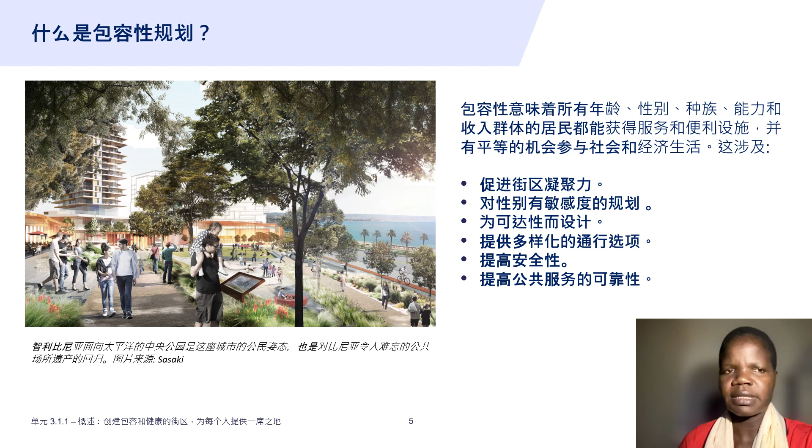Cohesive communities create opportunities for social interaction and community building by providing shared spaces and services, promoting collective ownership, and by providing co-housing and multi-generational living.

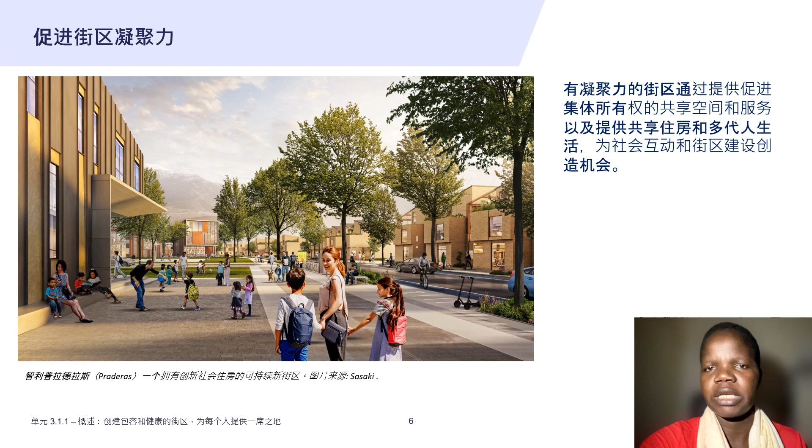Public space design should be flexible enough to meet everyone's needs. Everyone navigates the built environment differently, with abilities changing across a person's lifespan. Universal design is the design and composition of an environment so that it can be accessible, understood, and used to the greatest extent possible by all people regardless of their age, size, ability, or disability.

It ensures universal access to public space, infrastructure, amenities, jobs, trainings, and services. The principles of universal design are supposed to guide the design of neighborhood environment. They may be applied to evaluate places for retrofit and for new designs.

The principles ensure that places are accessible to everyone regardless of their physical, cognitive, or mental ability, and that the places are comfortable by bringing a sense of safety and belonging to everyone.

The design also must be participatory, that is, the design must be undertaken together with people living with disabilities. And the design has to be ecological by bringing in nature to provide cognitive, mental, and physical health for people of all ages and abilities.

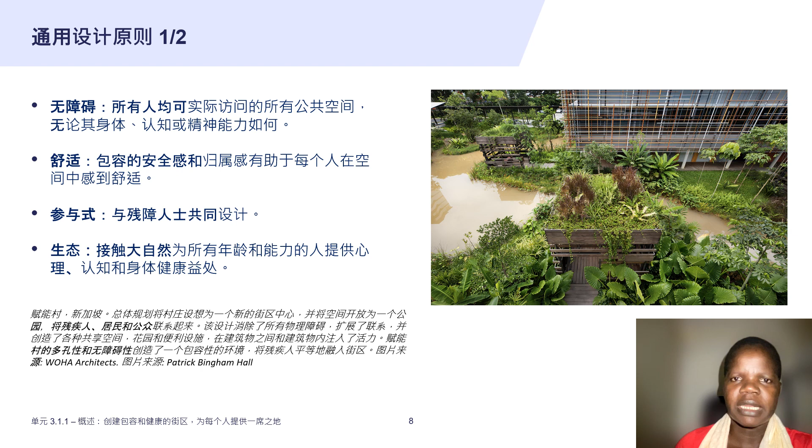Design of public spaces must be clear and understandable, with very legible multisensory signage and signals to help people of all ages and abilities to understand how to move through spaces. Universal design is also multisensory, incorporating design elements that can be accessed through different senses and provide multiple systems of navigation. It is predictable, maintaining the same clear and understandable design cues throughout a public space.

It is also walkable or traversable, that is providing wide sidewalks and bicycle lanes. Amenities like shops, restaurants, and medical facilities nearby help those with limited range to manage and maintain many aspects of their lives independently.

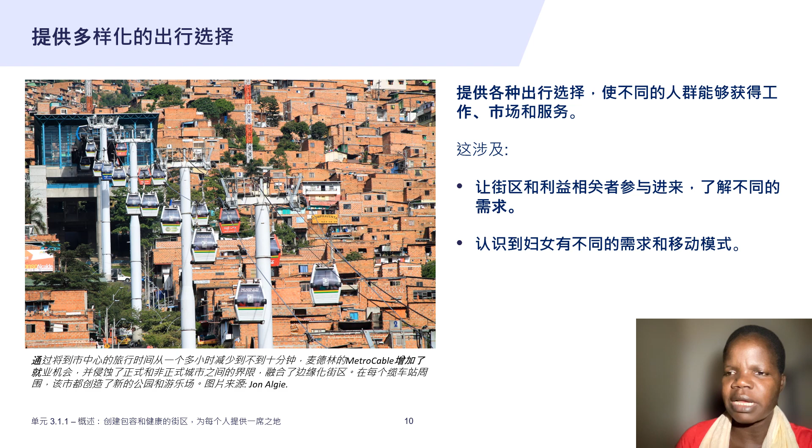Offering various mobility options allow diverse population to access jobs, markets, and services. This involves engaging the community and stakeholders to understand the diverse needs and recognizing that women have different needs and mobility patterns.

Planning with gender sensitivity takes into account that women and girls tend to be impacted the most by major environmental issues such as air pollution, biodiversity loss, deforestation, waste disposal, and exposure to toxic chemicals.

Therefore, gender-informed planning sets a target for women's representation in municipal council or committees. It supports the training of municipal staff members in gender-inclusive urban planning. It also ensures the design of public spaces with a gender-inclusive participatory process. It fosters the creation of safe spaces for women for informal work and outdoor markets.

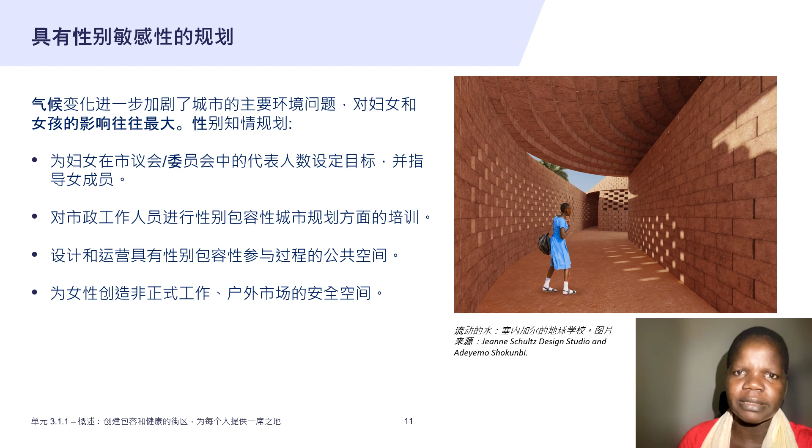The perception of safety and security can be improved by providing sanitation facilities in transport infrastructure and public space, adequate street lighting, pavements and sidewalks, and gender-based violence prevention and response services.

Reliability and resilience are enhanced by access to reliable service providers, for example energy and clean water, for all groups. These services must be resilient to climate or other events such as pandemics.

Welcome to Part 2 on designing places for healthy living.

According to the World Health Organization, health is a state of complete physical, mental, and social well-being, not merely the absence of disease or infirmity. Green and thriving neighborhoods with high livability foster comprehensive health as defined by the World Health Organization. Transforming housing and public spaces into healthy places creates conditions more conducive to community well-being.

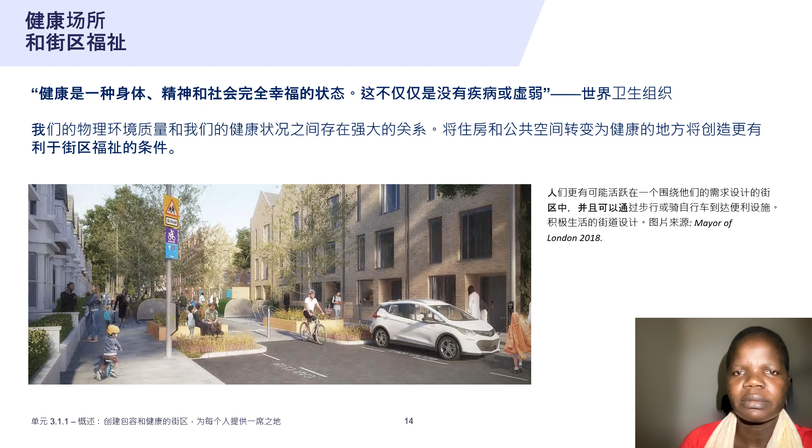Health begins in homes, workplaces, schools, and communities. The neighborhood layout shapes health choices and behaviors. Essential elements for people to engage with each other, eat nutritiously, work out, and play include natural spaces, safe streets and vibrant public spaces, and healthy and affordable foods nearby.

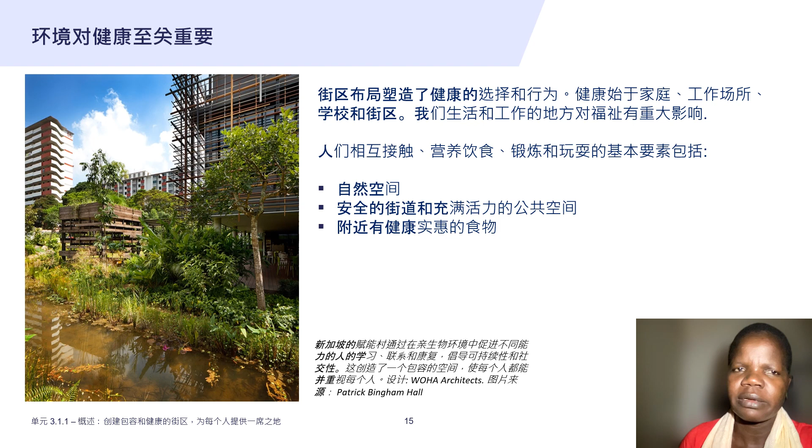Nature draws multiple health benefits, for example physical activity, diminished stress, longer life expectancy, and stronger social bonds. Policymakers can enhance natural spaces by providing access to nature with street trees and landscaping, investing in new parks, greening sidewalks, and creating waterscapes.

Solutions for safe streets and vibrant public spaces can be relatively simple and cost-effective. Policymakers can, for example, widen and resurface footways, reduce speed limits, and designate cycle lanes on streets or off streets using white lines or physical segregation alongside improved signage.

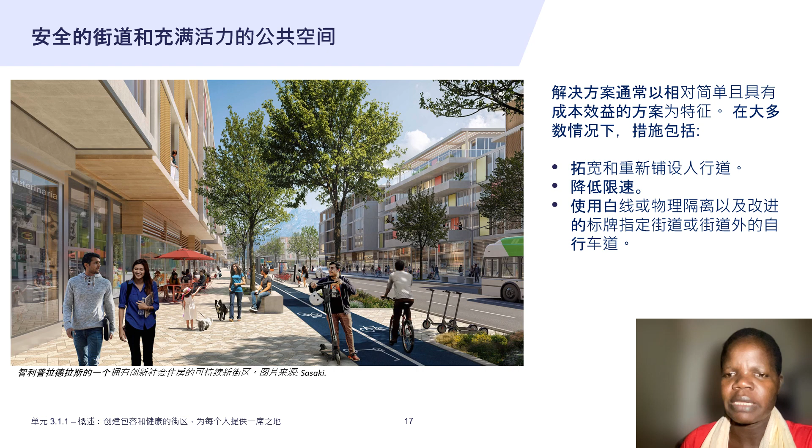Unhealthy foods contribute to diabetes and cardiovascular diseases in low-income neighborhoods. Policymakers can promote healthy and affordable foods by allowing proximity to grocery stores that sell fresh fruits and vegetables near homes, and by promoting urban agriculture to provide sources of fruits and vegetables within 20 minutes of home. Beyond nutrition, community gardens create long-lasting social connections within the community and have mental health benefits.

Groups susceptible to health problems encompass the youngest and oldest population, those with chronic illness risk factors, and those with low income. Inclusive planning for health involves undoing disparities in how long people live and how healthy they are, engaging the community in planning and follow-up of actions, and consulting people with needs, women, children, elderly people, and people with disabilities.

Welcome to part 3 of this unit, focusing on creating affordable neighborhoods.

Good and affordable dwellings are essential for physical and financial security, economic productivity, and human well-being. Besides demand-side measures like social welfare allowances, policymakers can implement supply-side measures with regulatory and planning incentives.

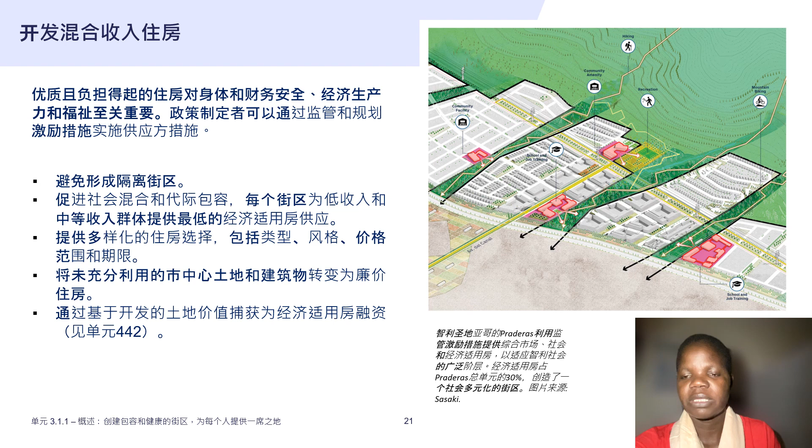Dwelling locations matter for affordability, and transportation costs impact the poorest, who are hit hardest by the lack of public transport systems. In the US, for example, in 2016, according to an ITDP survey, the lowest earning 20% of the population spent an average of 29% of their income on transportation costs.

A project integrating affordable housing and public transport is Praderas in Santiago, Chile. Affordable housing represents 30% of units, creating a socially diverse community. Praderas is also committed to creating an equitable and healthy living environment, including access to amenities and open spaces like no other socially integrated project in Chile. Praderas has 3 times the area of green space per capita compared to the wealthiest neighborhoods of Santiago.

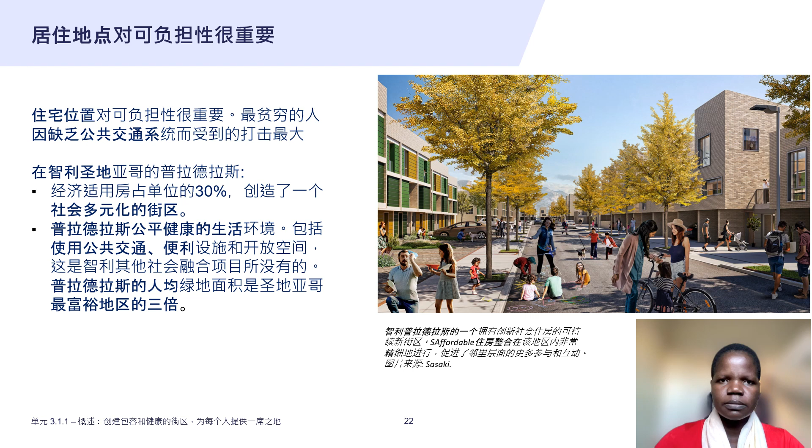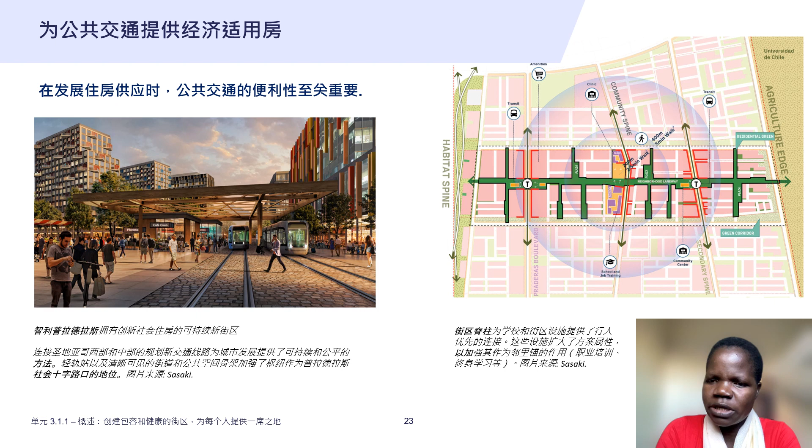When developing housing supply, accessibility to public transport is essential. In Praderas, for example, a pre-feasibility study for a new transit line along Route 68, the Superspine, has proved financially attainable and will greatly improve access to the city for this historically neglected part of Santiago. The Superspine is tied to a multimodal metropolitan transport strategy that triples the transit catchment area in western Santiago, serving over 3 million people. Welcome to the final part of this unit on upgrading informal settlements.

Although every city and informal settlement is unique, some common elements of successful upgrading practices can be synthesized. These include ensuring participation, providing physical infrastructure as the backbone of slum upgrading, addressing the needs for social infrastructure, ensuring tenure security, and addressing the root of the problem by creating opportunity structures.

Ensuring tenure security is a first step, as informal land markets are the way in which most households in cities in the global south get access to land and housing. Therefore, cities need to work towards formal land markets that work better for the urban poor. Policy should ensure that all households have access to different options with adequate shelter and services in suitable locations at an affordable cost. All households should have legally recognized tenure so that they have greater long-term security. Owners of property should be allowed to sell their properties at reasonable prices when they wish without compromising their future rights to safe and secure housing.

City governments can undertake many interventions to make land markets function better and enhance the security of tenure for residents. Actions include engaging with residents and undertaking data collection to intervene in land markets. Reforming the formal legal state-recognized land system can make it more widely applicable and useful for the poor. Cities may also implement managed land settlement programs and support owners to undertake formal transactions. Improving the security of tenure for informal tenants and promoting the supply of adequate small-scale rental housing is an effective strategy.

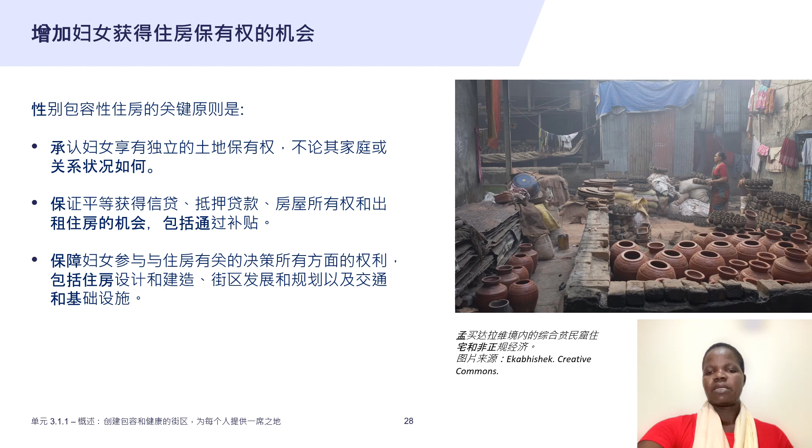Ensuring housing tenure should also account for the barriers that women face. Fostering gender-inclusive housing includes recognizing the independent right of women to security of tenure, irrespective of their family or relationship status; guaranteeing equal access to credit, mortgages, home ownership, and rental housing, including through subsidies; and guaranteeing the right of women to participate in all aspects of housing-related policy making, including housing design and construction, community development and planning, and transportation and infrastructure.

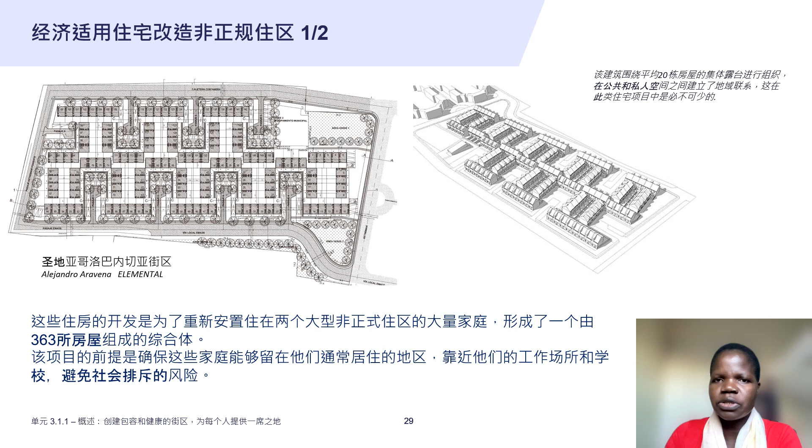Affordable housing can transform informal settlements. The dwellings in Lo Barnechea, north of Santiago, Chile, for instance, were raised in two phases and developed to rehouse most families living in two large informal settlements. The project's premise was to ensure that the families could stay in their usual areas of residence, close to their workplaces and schools, avoiding the risk of social exclusion. To make the best use of land and avoid overcrowding, the house prototype proposed goes up 3 floors and can be extended inwards.

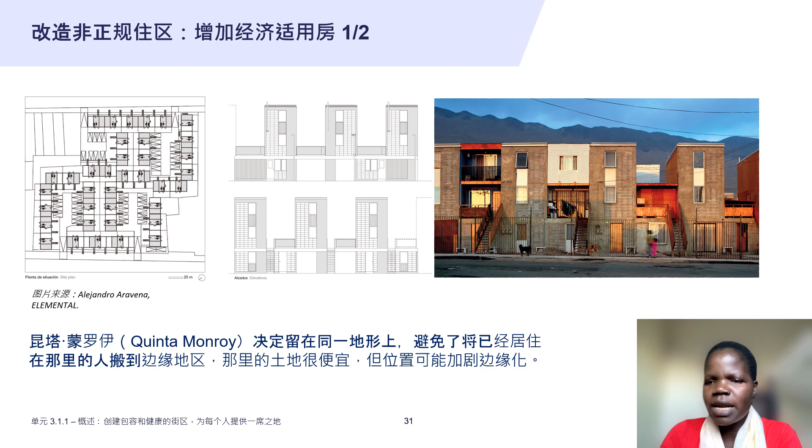This project in Quinta Monroy, at the time one of the last informal settlements in Iquique's center, shows an incremental approach to affordable housing provision. The first decision was to stay on the same terrain. Land costs 3 times more than the land usually assigned to social housing, but this avoided having to move those already living there to the periphery, where land is cheap but where the location can lead to marginality.

The subsidy of $7,500 for each family allowed building at best 36 square meters, half the area of a standard middle-class house. The incremental project typology makes an efficient use of the land, permits extending the houses in a controlled way to avoid overcrowding, and promotes self-building processes. Families are given half of a good house equipped with quality services, and they are offered technical support to carry out the extension on their own.

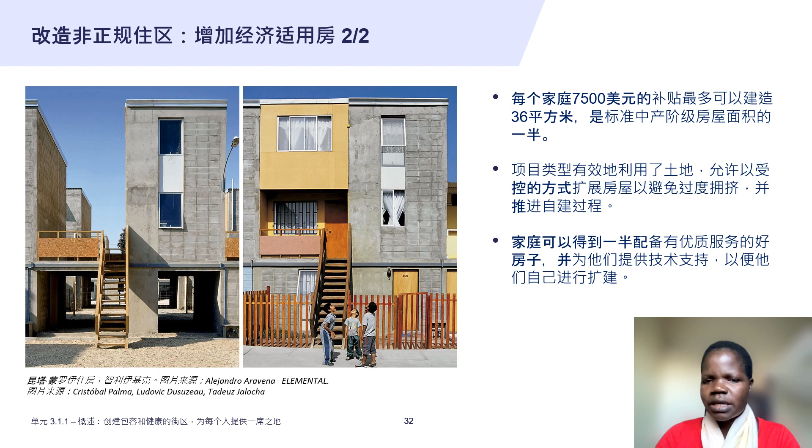To conclude, let's summarize the key lessons from this unit. The key takeaways are: Inclusive design ensures that residents of all ages, genders, ethnicities, abilities, and income groups have access to services and amenities and have equal opportunities. Natural spaces, active travel in safe streets, vibrant public spaces, healthy and affordable food nearby, and fitness options all ensure health and well-being. Good, affordable, and diverse dwellings in well-connected places are essential for physical and financial security, economic productivity, and human well-being.

And lastly, ensuring participation, providing physical infrastructure, addressing the needs for social infrastructure, ensuring tenure security, and creating opportunity structures are key for upgrading informal settlements.